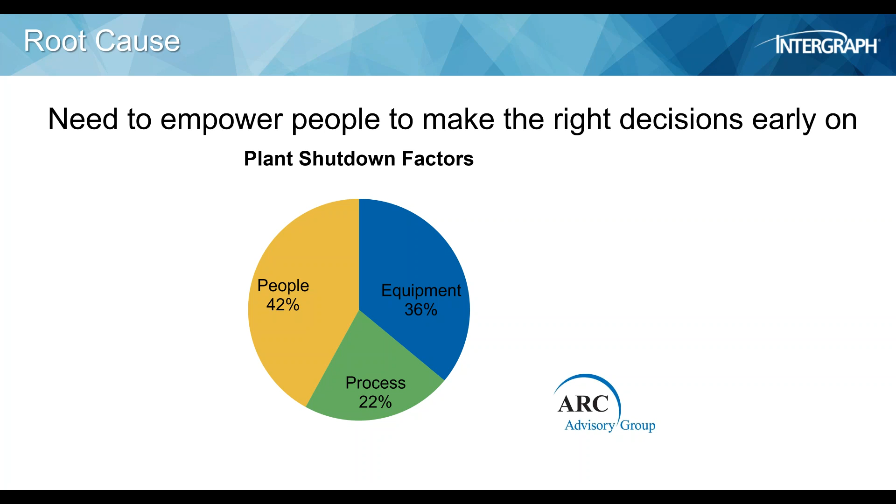It's just the fact that we need to empower the people at the plant with the right information. I say information, not data, because to me information is the data in context. That's very, very important, to have that information in the context of the task you are performing. And I know for sure that we can definitely lower that 42% number, because obviously that's not a good thing.

Here you see some other numbers from ARC, very interesting, that the biggest revenue loss is of course from operator error. And like I said, it's not intentional, it's just that not having the right information at the right time, and with that, not making the right decision.

You see 60% of the operational downtime is caused by delays of finding stuff. Even I, as an engineer, know that I spend a lot of time finding stuff, and that's kind of not fun and boring. You want to have it quickly there and spend your time on the real work you need to do, either engineering or operating the plant.

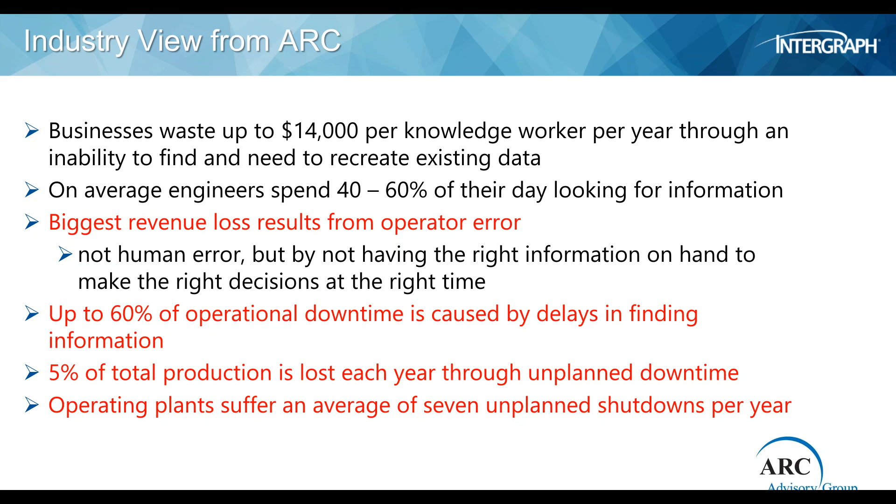But you see tremendous cost is involved when you shut down a plant. If you ever, on average, 7 shutdowns, unplanned shutdowns, that's terribly costly. So we definitely need to do something about it, and I think we can do something about it with this engineering design basis. Now you have to start at the end, like I said.

But in that small part, you already determine how this plant is going to operate, how this plant is going to be maintained, and the safety and all those very important aspects that are so important when you operate the plant. So to be able to do the operation right and to save cost, you have to start at the end, and you have to think about these things early on.

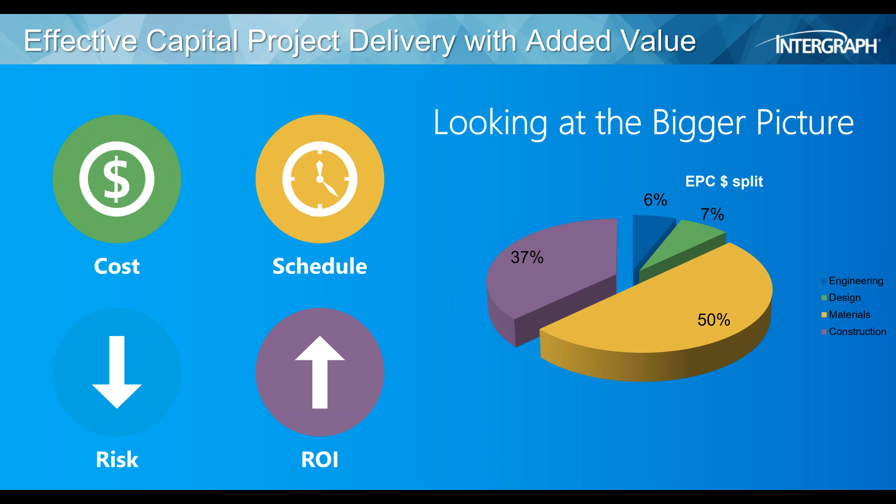Of course, the challenge is that these days these projects are very, very complex, and some of them are very large. I've seen projects like LNG plants that have 2,000 P&IDs. It's a huge facility in the Middle East, and for an owner-operator to check all this data and all these P&IDs in these fast-track projects, which seem to go faster and faster every time, is just a challenge, and it is almost impossible to do that by hand.

And I'll talk a little bit about how a computer can help a little bit with that goal, to make sure that you get what you want, not only to build the plant but also to actually operate the plant.

And there are a lot of standards. The good news I always say about standards is there are many of them. It's not only design practices, it is safety practices, it is also practices from customers.

I took this example - Shell is a Dutch company, I'm Dutch, so I feel some relationship with them, and they have what they call the DEP, design engineering practices. That's their way of putting the design together based on their experience, their best practices. They also want to make sure that once it is put together, it is not only engineering sound, but also operation sound. Of course, they have many years of experience, and they feed it back to those design practices.

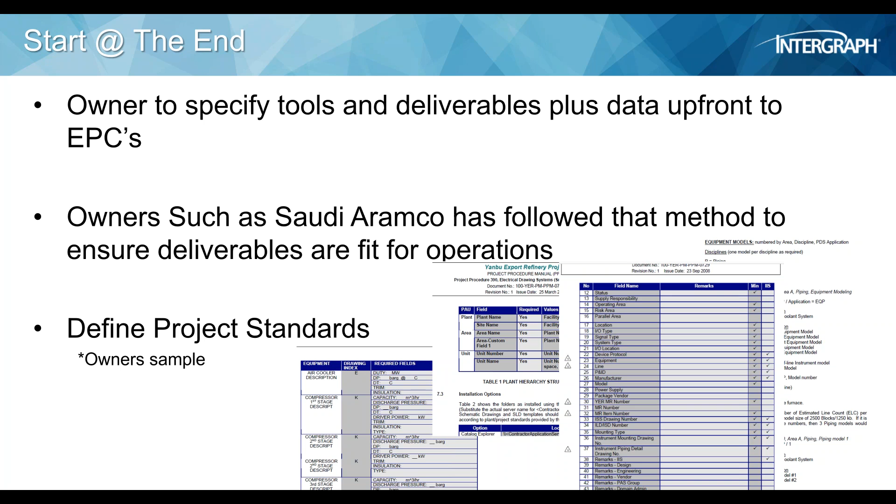As an EPC, you only have one objective, and that is to get enough data to buy, install, and maybe commission - and that's it. But then after that, the owner takes over, and maybe he wants additional information that he thinks is important and can help him in the operational phase. But if you don't ask, you don't get. And if you ask after the fact, it's going to be very difficult and/or very expensive. So start at the end, make sure you define it up front. It's a lot cheaper, and a lot better, and it will get you the engineering information in the end that will help you in the operational phase.

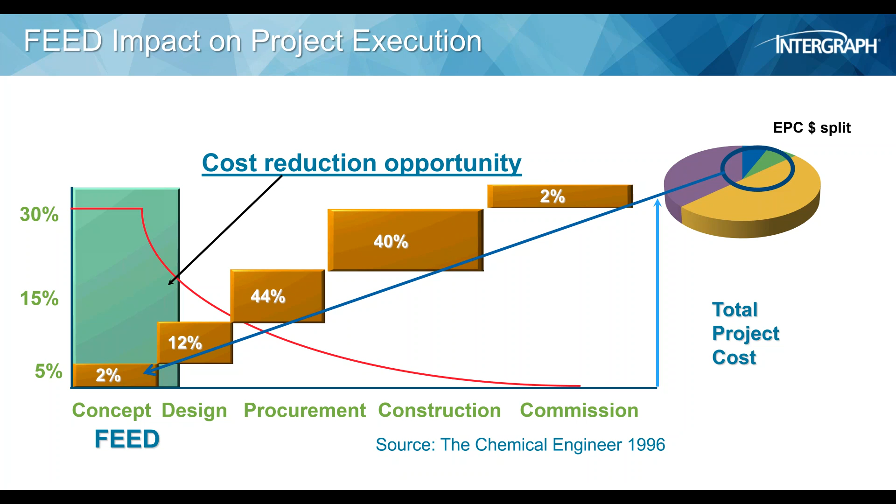Just some lessons learned from my side. It's the same domino effect: if you make some assumptions - and engineering is about making assumptions early on and then refining it till you finally have the final design that you're going to implement - there will be changes, of course. I don't think a project is ever executed where everything is right in the beginning and you go one time through this whole workflow and be done. No, there are iterations, but of course you want to minimize this rework and iteration, so making the right decision early on, that's the trick, to not have this ripple-through effect, or at least minimize it.

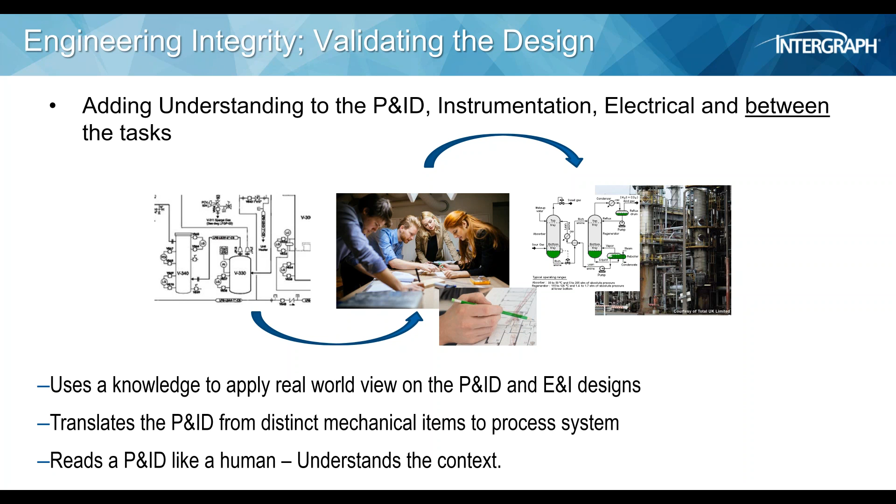So basically what we need is some kind of system that can read these designs, the P&IDs, instrumentation, whatever, like an engineer, but then automate that. Because when I was an engineer, we basically glued the P&IDs together and had them on a roller board, and we just rolled them backwards and forward, and everybody's leaning over it scribbling on it. You can do that with a couple of P&IDs, but when you have like 2,000, it's going to be a lot of scribbling and take a lot of time, and by the time you're done, the next version is there and you start all over.

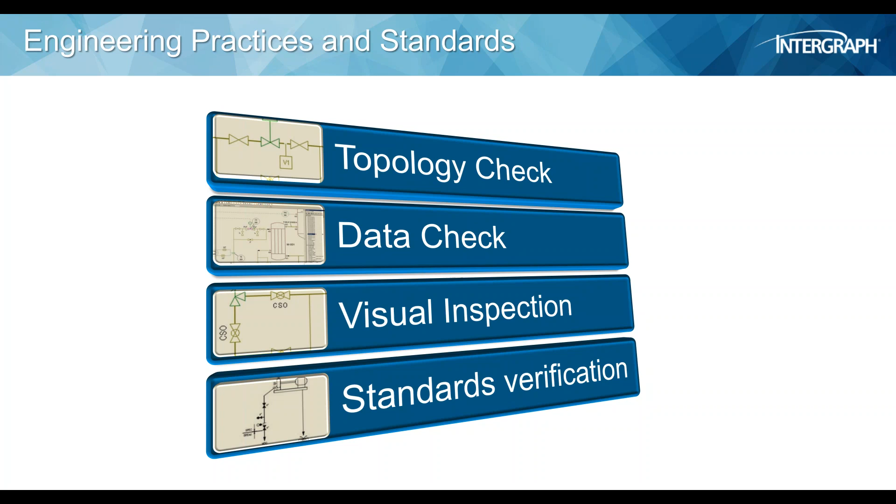So we knew we needed to somehow capture that information, capture that data, and automate that checking, at least for the bigger part. We want to check the topology, the data, the visual, the drafting stuff, like the right labels and symbols, because in the end these deliverables - I'm just taking the P&ID as an example - they'll be printed and somebody has to read it, even in the field. He wants to know if this valve is car sealed open or not, because that tells him something about how to maintain and operate that particular component. And of course it's checked against the standards, there are many of these, plus your own company practices and standards.

So for instance, I have this little example, very simple, but you see this pressure relief valve configuration - all the piping and everything is hunky-dory. Now you have to test that pressure relief valve to make sure the setting is right and it operates right. It's a safety instrument, so you need it to be correct. But little problem - if you look, there is a drain missing on the top line, so they basically cannot isolate and drain it to safely test it. That's a problem.

That can cause people to say, okay, I'm not going to test it, which could later become a safety issue, so you don't want that. You want to do testing and checking up front to confirm yes, this valve is there, and we can automate that for you to make sure the design basis is right. So if the operator goes in there to do the testing, yes, all the components are in the right place to do his work.

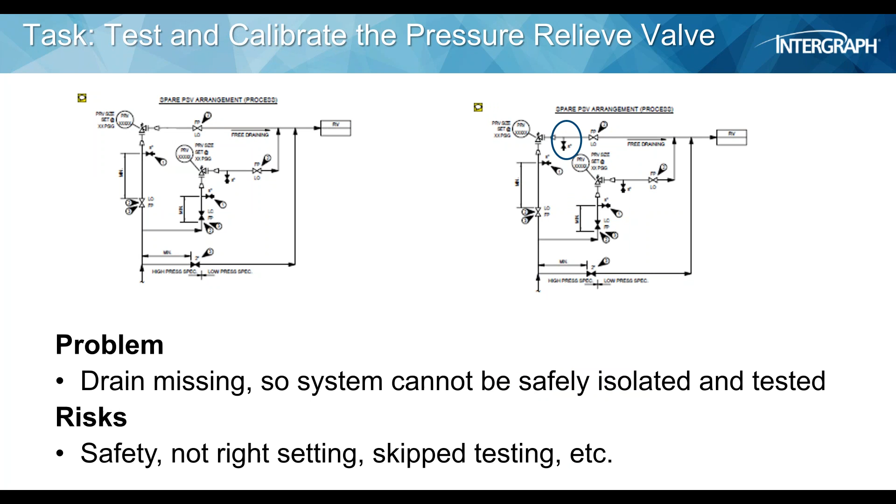And of course this can also be done - I took the P&ID since that's such an important document for the plant, but the same applies for instrumentation, which is also very important. Check if you have the right cables for thermocouples, for electrical, if you have the hand switch for lockout-tagout, to put your hand in a pump when somebody could switch it on - that's not very healthy - and have the right enclosures with respect to area classification and so on.

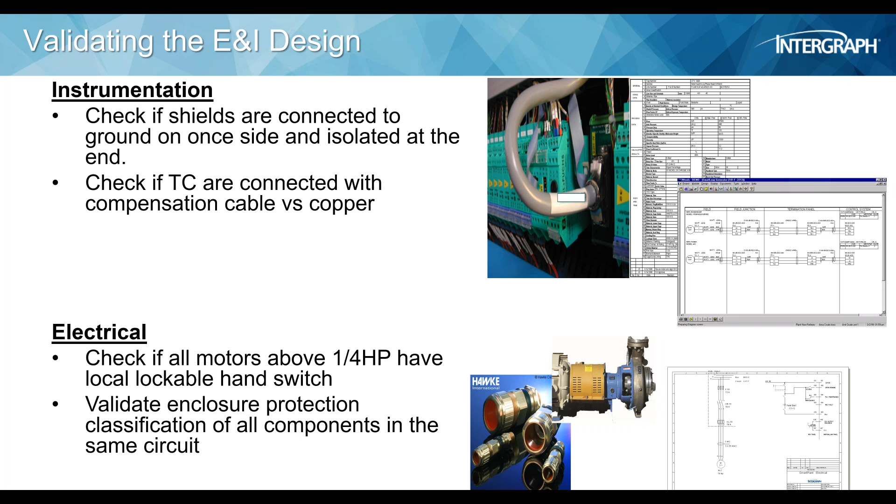So you can check that early on, so you have the right stuff, not only within the task, within the disciplines, but also across the disciplines, like across process, the P&ID and instrumentation. Make sure you have the right valve, the right line sizes, the right process data, to have consistent data there for later on if you want to do some maintenance or replacement of that component.

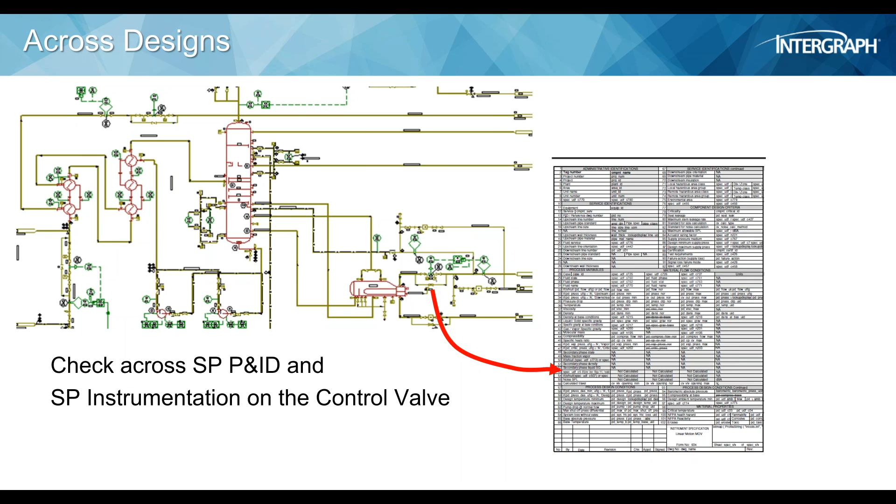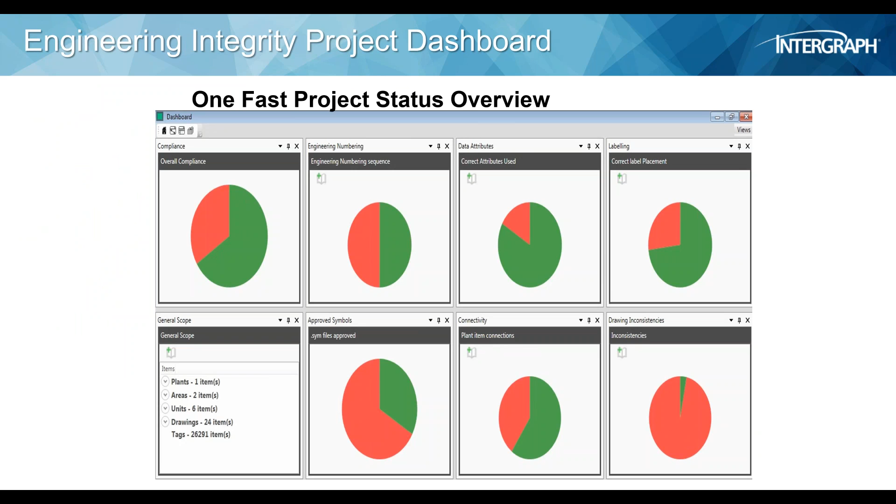Now the cool thing is, and everybody these days is asking for dashboards, it's very fashionable I guess, so we also show you here a little dashboard, and obviously red is not good and green is good. The nice thing is when you're at the plant and you've done some of these checks against the design, because there's always changes during the running of the facility, you can do this check on the EPC side, but also at the owner-operator side.

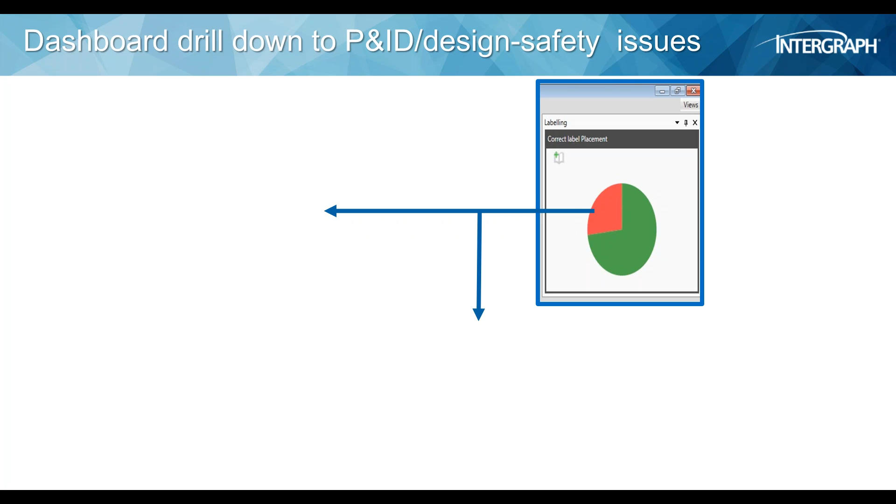You can actually click on one of those little tiles and navigate to see reports, and also actually a picture of, hey, what is actually wrong there? Can I live with that, or can I not live with that, and fix it? But the thing is, you have all this information at your fingertips, and it's coming from one single source.

Rather than, I have a P&ID, my own P&ID on my desk that I marked up for the last 5 years, but somebody else has the same P&ID on his own desk that he marked up for the last 5 years, and guess what? They'll never be the same.

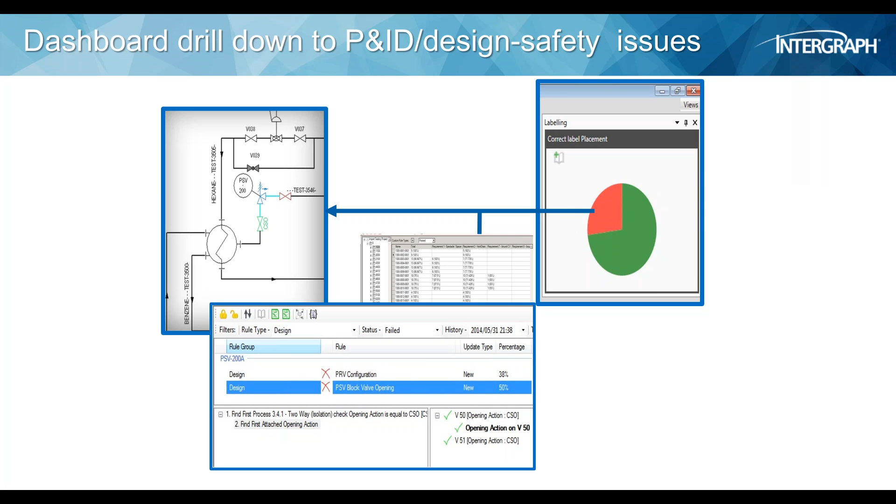So once you have the engineering design basis created, you started at the end, you've defined everything, you have everything in place, and now you want to use it. I'm going to give you some examples.

So, of course, you want to reduce the risk, safety, and make sure the guy has the right information to make the right decision, and doesn't fall in the category of the 42% that accidentally pulls a wire or something to shut down the whole plant.

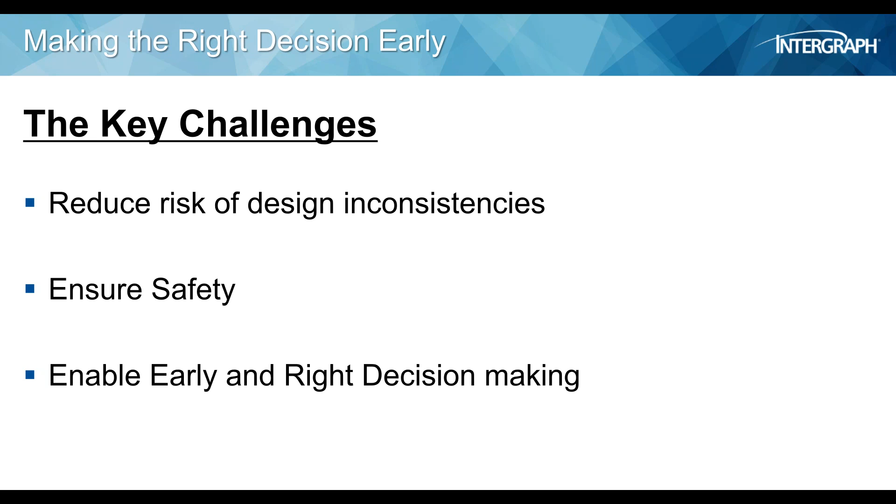That's bad news. I understand that engineering systems, like P&ID, instrumentation design systems and so on, are not mission critical, as I call it, for a plant. Mission critical systems, what I call mission critical, are like a DCS system. I have never seen a plant run without one, so you have to have that safety system, process systems. There are ERP systems, there are mission critical systems in a facility.

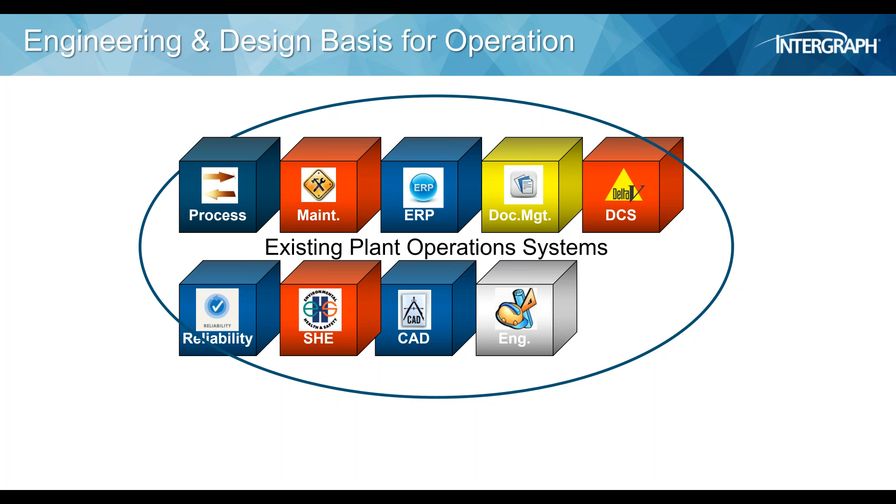However, if you look at those, you see that most of these mission critical systems have some kind of a need of this engineering data, engineering and design information. DCS, of course, they're looking at the control system data, the safety system at the P&ID and process data, and so on. So there is definitely, the engineering and design basis plays a critical role in mission critical systems that you have on a plant.

So I mean, if the P&ID system goes down, the plant doesn't go down. If the DCS system goes down, the plant probably will go down. But 1 and 1 is 3 — if you have both of them up, I think you can leverage that information and capability to help you lower cost and risk. Now, some examples.

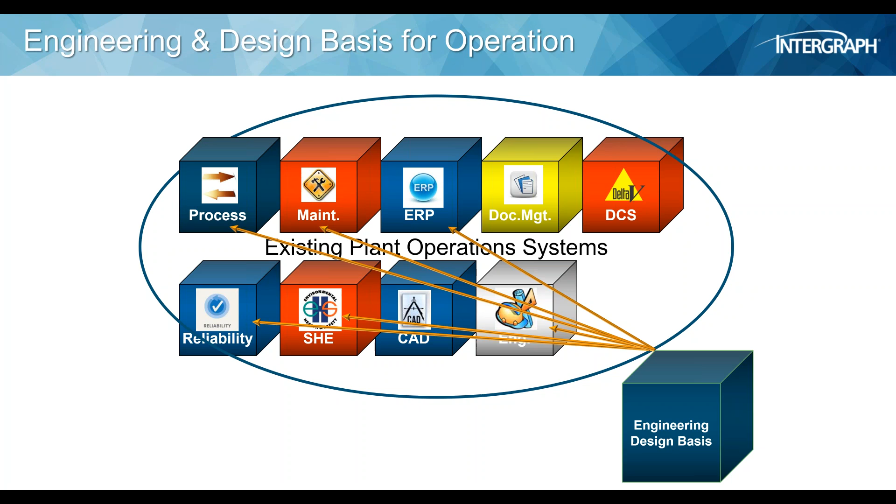Now this particular maintenance guy in a plant in China, you see in the picture maybe that he has a little sniffer there that he holds up to the flange, and what he does is LDAR, leak detection and repair. So he has to go to the plant with his sniffer and collect the data and see if something is leaking, and of course if it's leaking too much, something needs to be done.

So they use the P&ID as the roadmap for the plant. I don't expect you to read all the numbers, but the red little tags are the points that he has to go to with his little sniffer, and we can actually tell him when, and keep track of it, and manage that he doesn't skip anything and does it all on time.

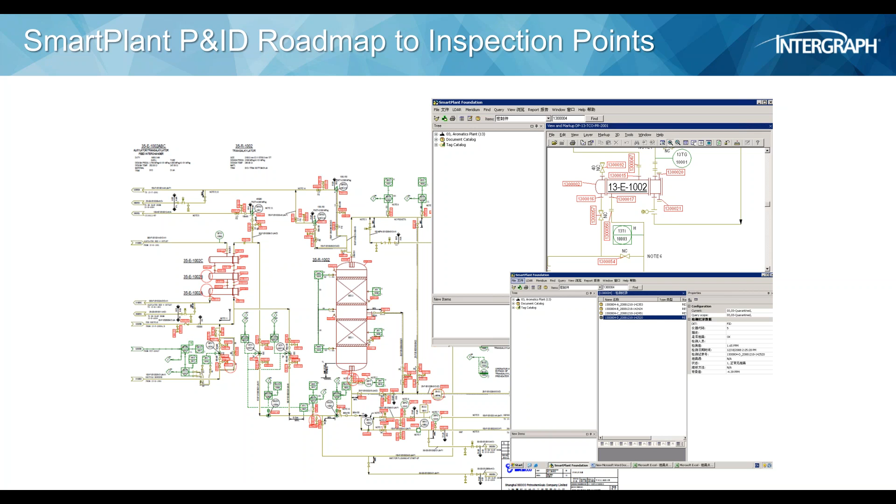So once he's collected that information, he can do a risk-based inspection with the system out there. And if this thing is leaking too much, then it can actually be given to SAP, and a work order is issued to replace something, fix something, whatever is needed, and then update the design. Voila, you have the updated engineering and design basis for the next round of checks. But you can see here how the P&ID is actually helping manage and make sure this LDAR is executed right.

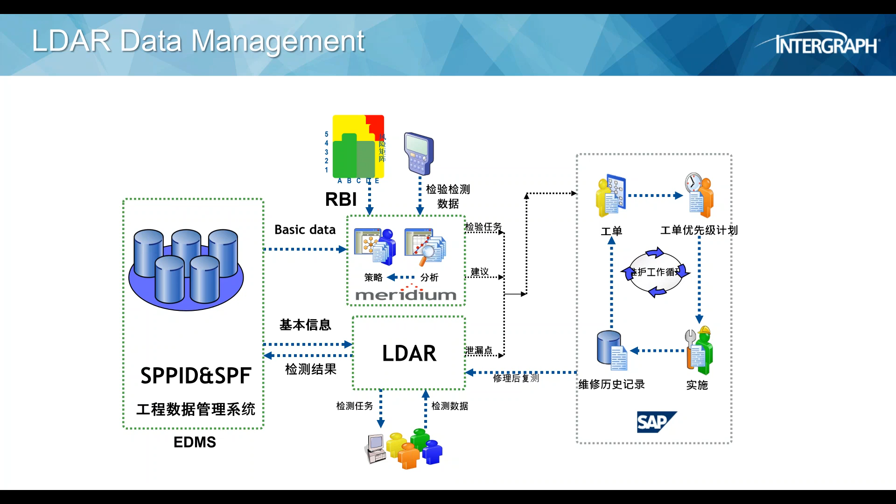And it could also be a safety issue because there's something leaking that could be flammable. That's also another good thing.

Instruments are very important. They play a role in safety, like we just talked about with the pressure safety relief valves, but they also play an important role in making sure you have the right quality of product produced, checking temperatures, levels, flows, and what have you.

But it can only check right if it's actually acting right, and you need to calibrate that. You see the guy with the little yellow box there - that's a Fluke calibrator in this case. On one hand you have the engineering and design basis, the instrument data, the specification of this instrument type and how it is behaving.

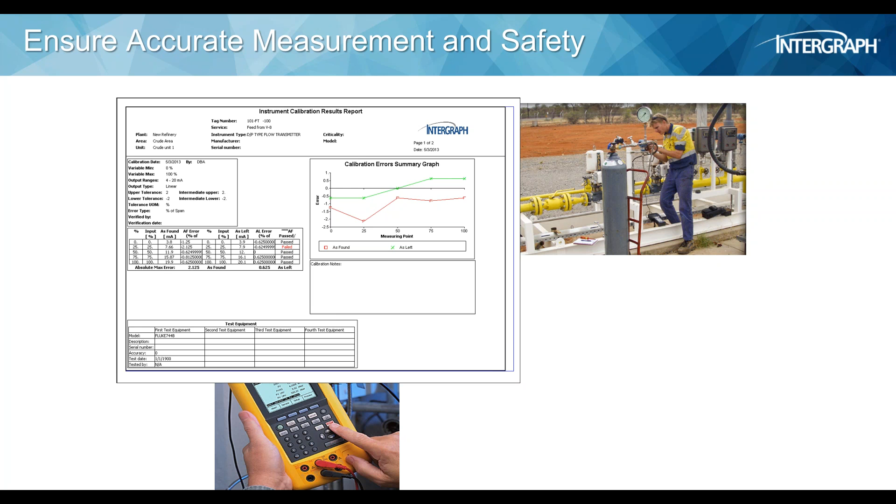Now the nice thing is when you calibrate them and upload it back into the system, you can do what they call as-found, as-left, and recalibrate, but you can also see how this instrument is behaving over time. That may give you the right information to decide that maybe this isn't the right instrument for that particular task and replace it, so you have to do less calibration or have fewer set points for this particular solution. That helps with safety, can help with product quality, and can help reduce cost, since you don't have to calibrate the thing every week or so.

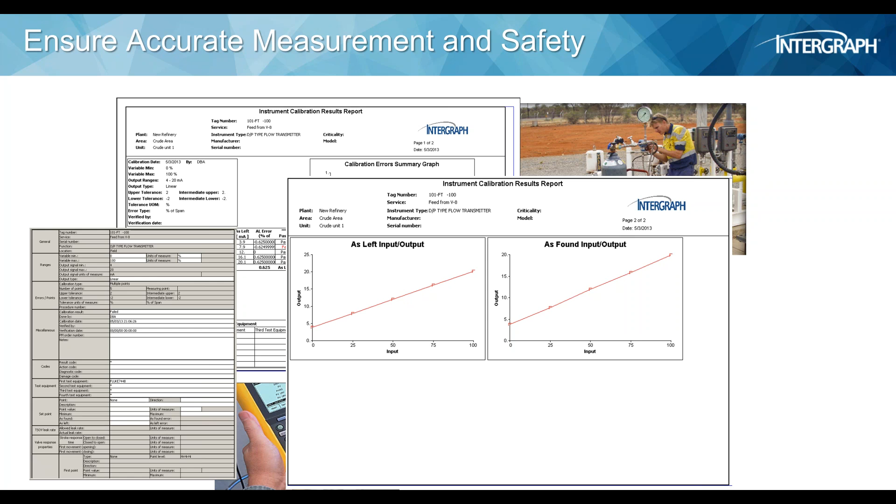Another example is when you want to do maintenance on a piece of equipment, you want to make sure it's isolated, electricity switched off like I said before, with a lock on it and a label and all that. But also for the process, you have to turn down or close all the block valves, and to find them, the engineering database can help you locate those, because when you have all the lines connected in an intelligent way, you can navigate back from the equipment you want to isolate to the first available place to isolate it.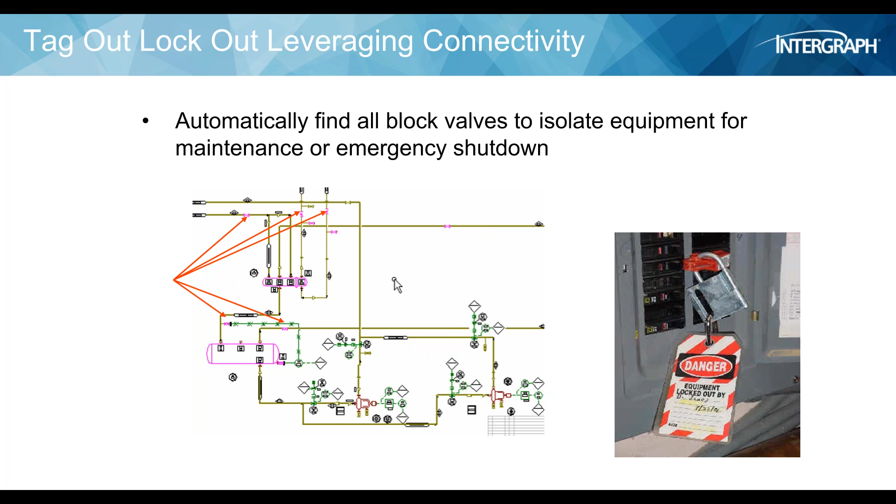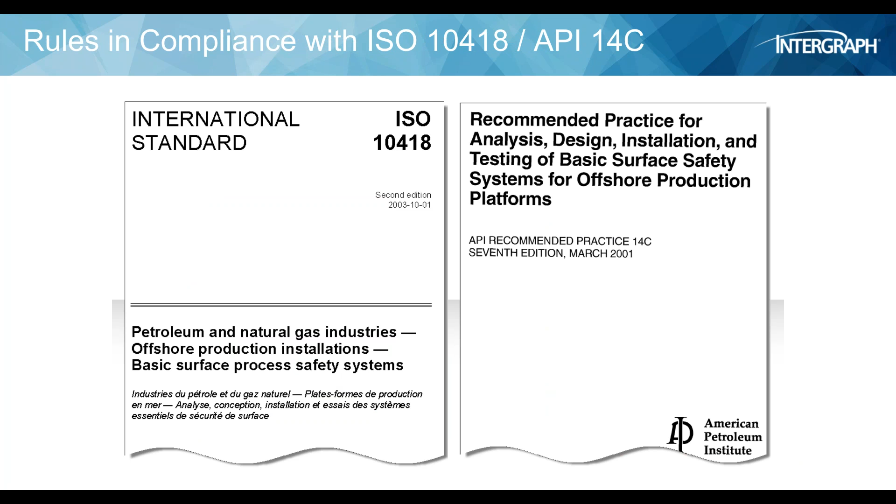Now safety - I told you already there are all these standards out there. This one, ISO 10418, deals with safety systems on offshore platforms, and there are a whole bunch of rules in there. This is just an example of how they hook up a pressure safety valve and all the equipment around it. This is just a procedure, but then it has to be translated into the design.

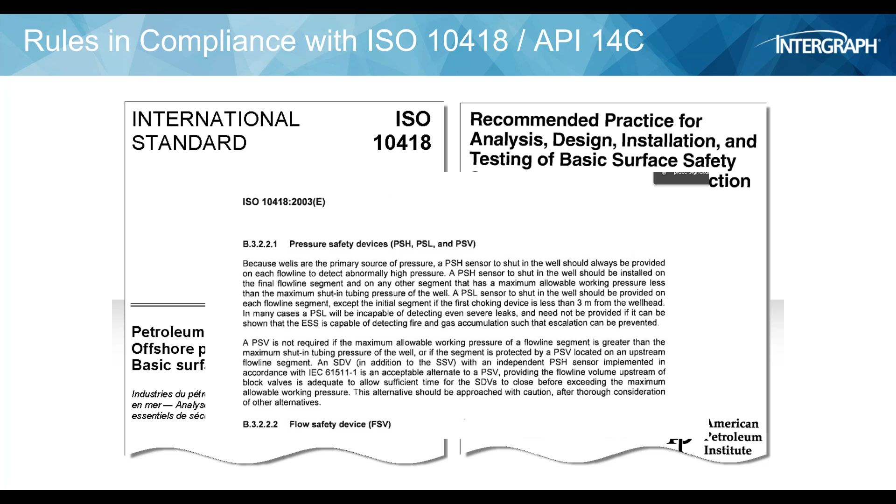So in this case you have a vessel and all this stuff around it, and how do you check that this is in compliance with these rules, and stay compliant with them? You can actually check that with some rules in the engineering and design base. So you can check the design, and if you make changes, you can recheck it to make sure it's still compliant with these standards - for instance, that you have the right components, the right piping, the right pressure setting.

You don't want the pressure relief valve to have a lower or higher setting than the vessel before the valve opens - that's not the intention of the protection. So once you check that, we can create these reports, and you see the green ticks where everything is fine, and red ticks where something is not in compliance anymore. You just have to check it, make sure it's right, and not discover it after the fact.

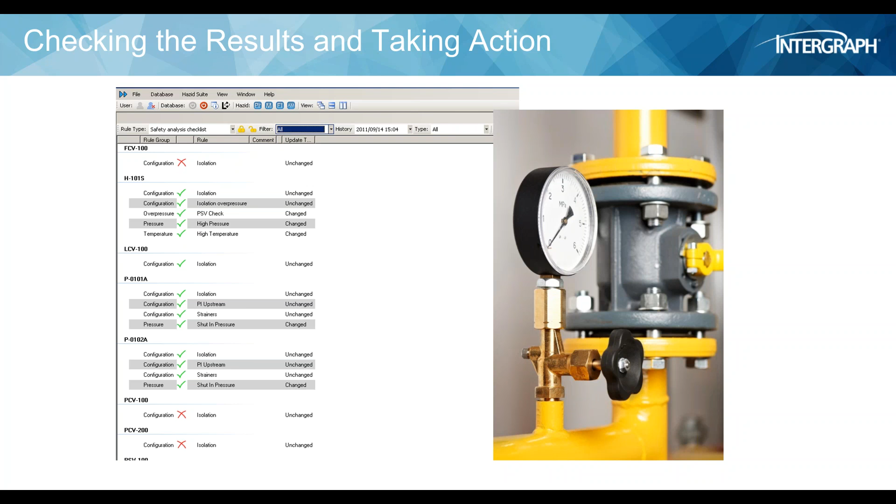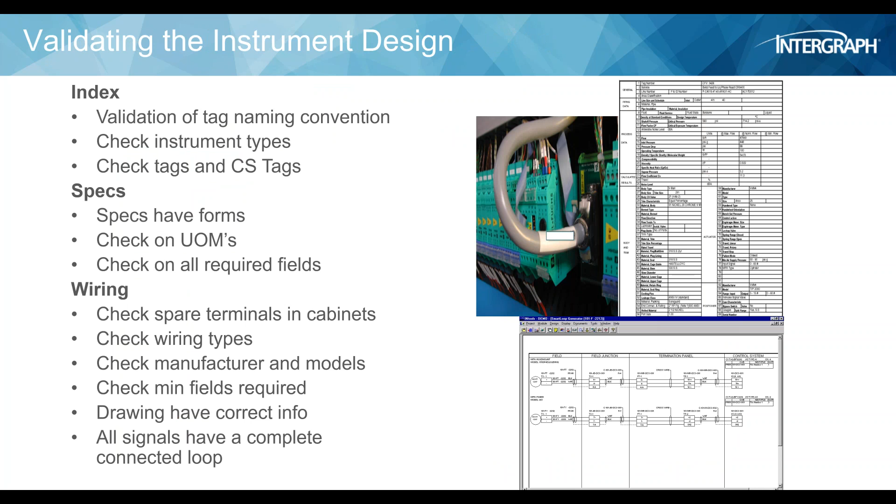That's not good news. So I gave examples earlier too, because I don't want to give the impression I'm only looking at P&IDs - instrumentation is the same thing. You can make checks at the engineering phase, but also at the operational phase, to ensure your engineering and design base is solid and sound. Same with electrical, of course - whether you have the right cables and the right enclosures and what have you in the electrical design arena.

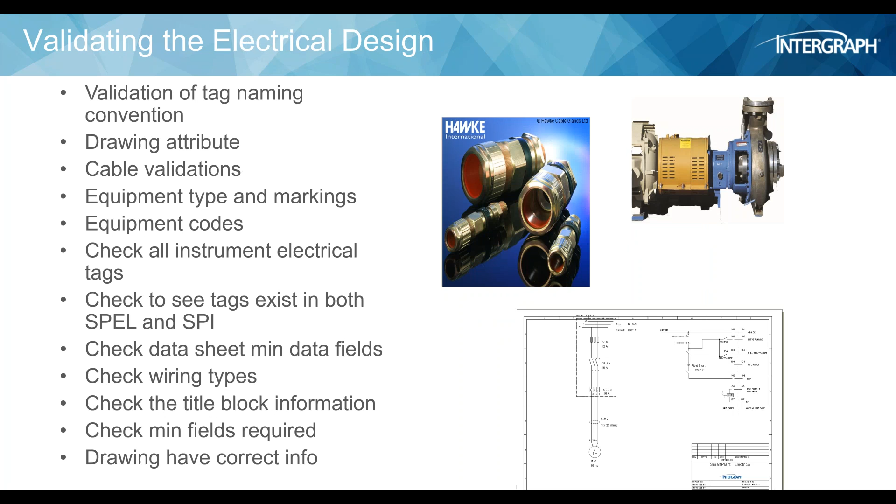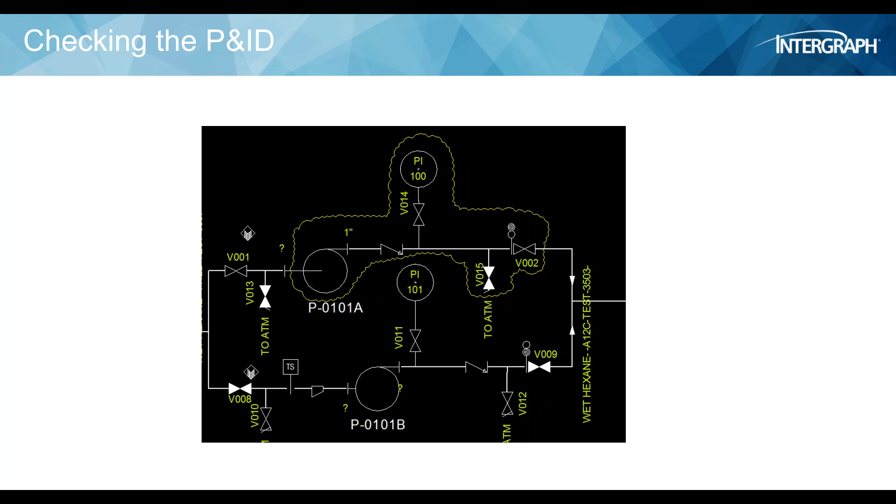But if you look twice, you see the PIs are nicely aligned, which gives you an impression that it's looking good. But if you look closer, you see that one has the check valve directly after the discharge, and the other one has the check valve after the PI. So the location is different, and it's not right, it's not consistent. When people make changes, you have to keep checking if it's still correct with your engineering practices, so you keep the design basis right.

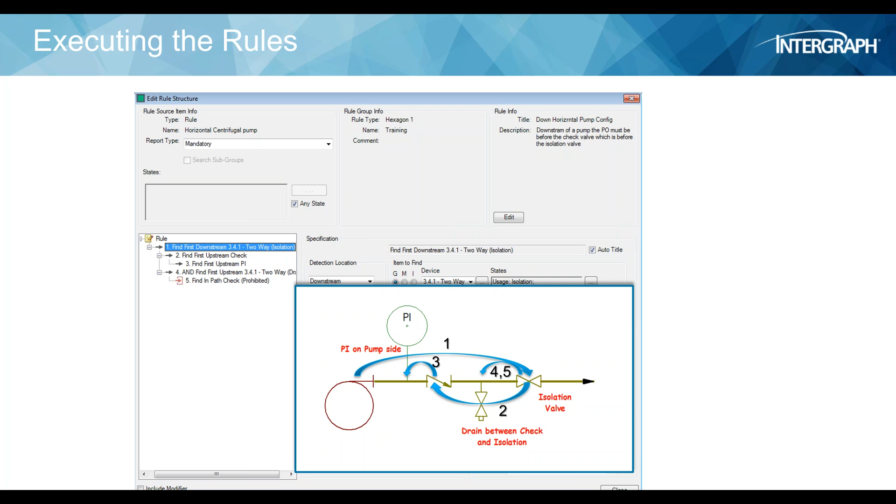Some people ask me, that's all nice talking about these rules, but I'm not a computer scientist. Well, I'm not either. These rules are not so difficult to make. If you know about engineering, anybody that knows that can make these rules. There's a simple way of nesting all these questions into a simple user interface to make these rules, so you can make rules for your own practices, your own safety standards, and what have you. There's no magic involved here, and you don't necessarily have to have a computer science course to do this.

Another example is the company Bayer. Well, actually this is their plant in Antwerp. They renamed their facility, this is a Covestro company now, but it's the same method and the same thing they're doing. They use a web-based viewer to access the engineering and design basis, so they can see the P&ID, the data sheet, and the loop diagram, as you can see here.

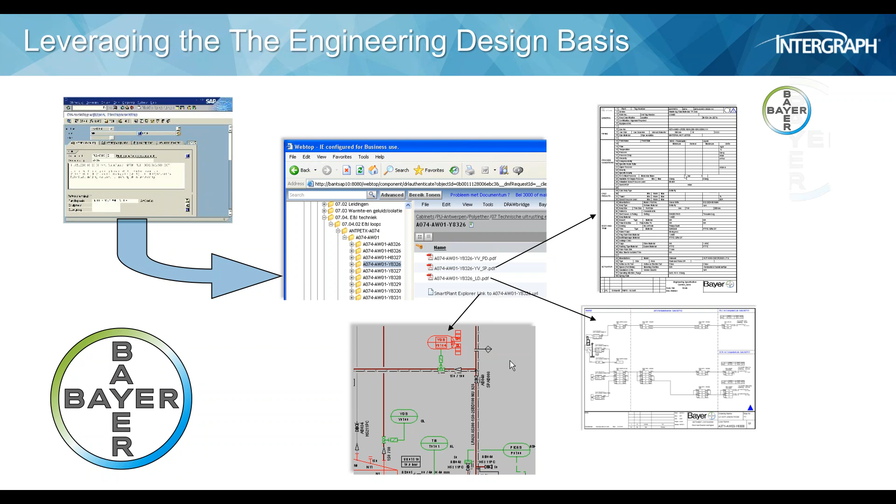What they like to achieve is, of course, safety and reduced search time. They've got this little web tool, and they can do a simple query for the people out in the field, lower cost, and of course super fast. Then they can initiate a notification to their ERP system, SAP in this case, to make fixes. The whole idea is that you have a single source, the engineering and design basis, that everybody can access using this web tool, and get the data to make the right decision at their fingertips.

If you want to go to an instrument and unhook it or do something with it or replace it, you can get the information to see, okay, if I do this, what can be affected, what's the spec, what is the wiring, and so on.

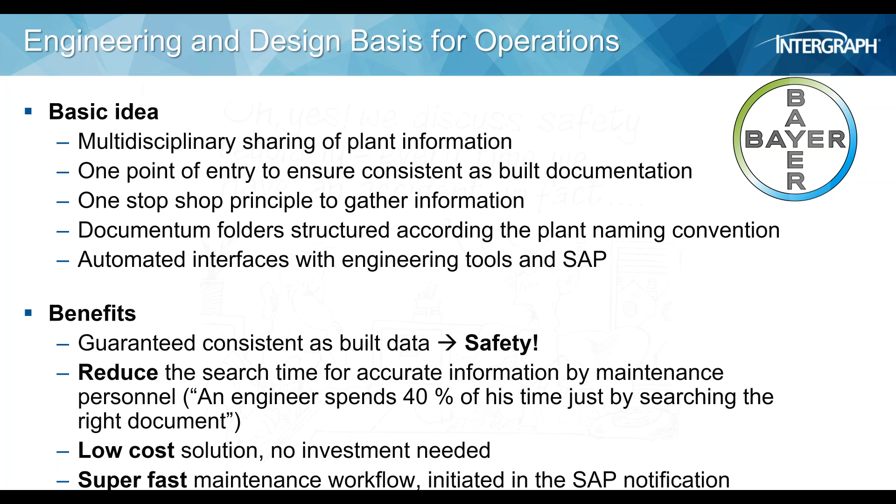Let's talk a little bit about safety. You see these guys discuss safety every time when they have an accident, which is not a good thing, after the fact. We want to do a little bit better and get going from a reactive type of setup to a safe, sustainable operational excellence.

That's what we want. You will see that when you do that, your cost goes down and your production levels go up. So you need to put procedures in place and access to engineering information in place to facilitate this road from reactive things, like the two guys were just talking about in the slide before, to safe, sustainable, operational excellence. And it is definitely possible.

Part of it is also people. You have to make it part of your culture, and you have to train. I understand that, that's a big part actually, I think. But also in combination with that, you have to have the right tools and the right information to make that happen.

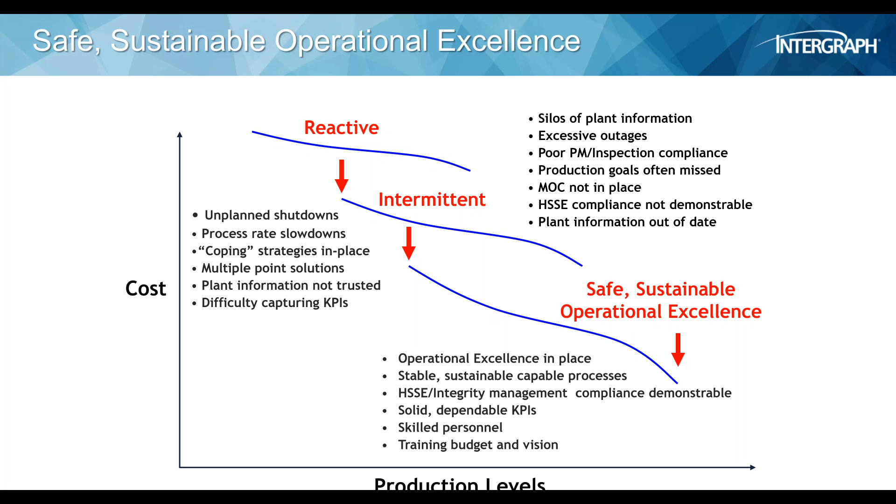You see here the OSHA 14 elements, a whole bunch of them. I'm not going to go over all of those, but the bottom line is that there are solutions out there that can help you with these 14 elements. It's about requiring access to asset lifecycle information. Some is document management, some is 3D, some is the P&ID, some is training, but there are definitely components out there that can help you. The engineering and design basis is definitely one component that plays a role in, I would say, the majority of these 14 elements.

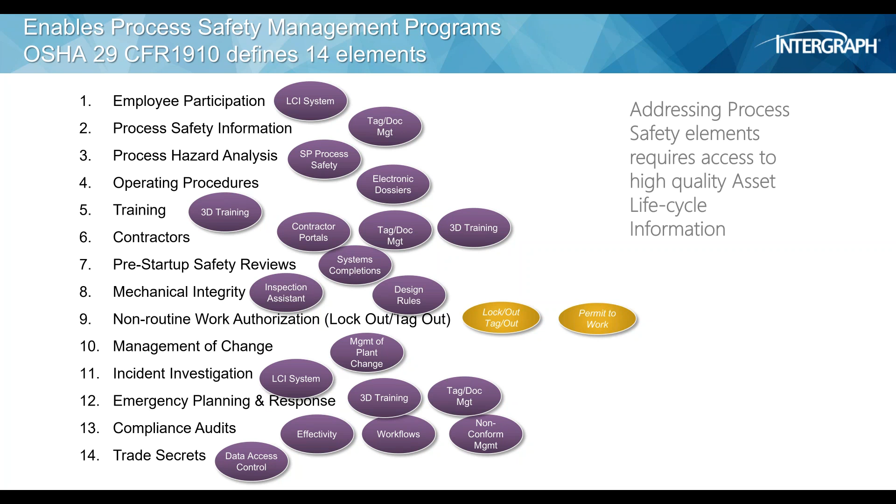Talk a little bit about safety. Now, everybody always talks about HAZOP, so I thought, okay, I'm not going to talk about HAZOP. So I'm going to give you another example.

This is, you all probably have seen this type of drawing, area classification. It's also very important. On this 2D drawing, normally, it gives with these shapes and hatching an idea of where certain gases can be present at the plant, either at certain times or all the time, and knowing that, what kind of enclosures or safety measures you need to take.

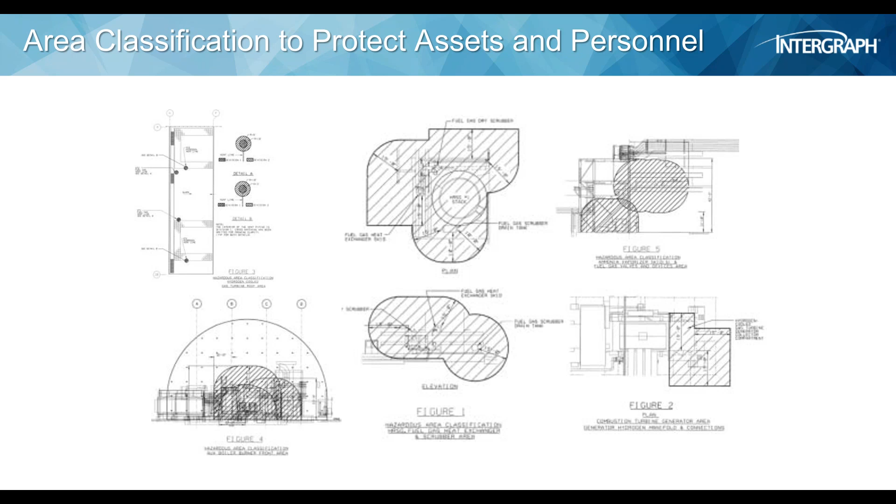You don't want to light a cigarette in one of those areas. There are different standards, the Class 1 Div 1, but you also have the European standards. But it all boils down to basically defining the areas where there are explosion possibilities, and you want to make sure that you do the right thing.

So I thought, okay, we always made these things in 2D drawings. When I worked at Fluor, the electrical department was responsible for these drawings. But I thought maybe we can do something smarter there using the engineering data. So I thought, okay, we can maybe do it in the 3D model, because it is a shape anyway, it's not 2D, it's a certain area.

It's not a flat thing, and you need to identify that, and then maybe it can help you make sure that you have the right enclosures, and if you have to issue permits, that you know what's going on in the plant, if you have that data right. So it's kind of using some rules as a watchdog to make sure it's the right stuff.

So I'll show you a short little AVI on that. Now you see the 3D model and the P&ID. Now the piping guy is taking the valve from the P&ID to place it in this pump configuration. And with that, you can not only get the valve, but you also get the process data and everything associated with that, and also the area classification.

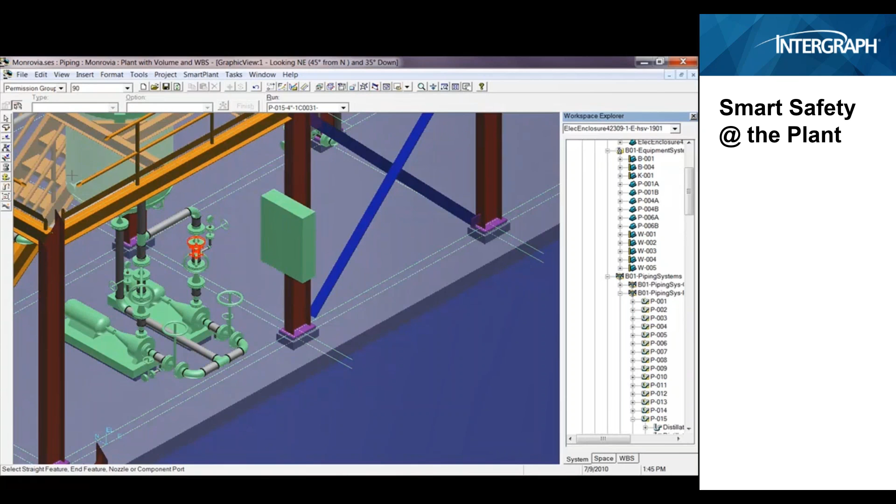Now, we can execute rules in the background. They're constantly running there as a watchdog, and say, oh wait a minute, based on these rules - and you can set dimensions, I chose a sphere, you can do any shape. So I said, okay, this sphere, in this sphere you have a certain area classification.

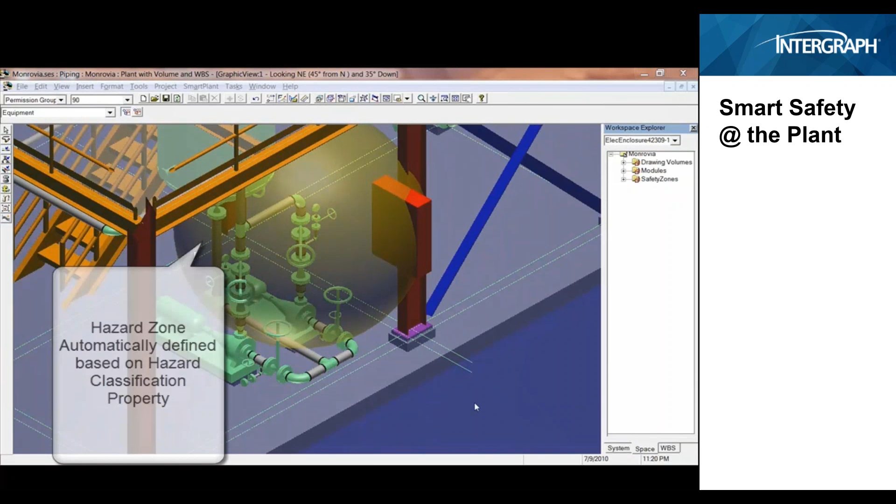Now the cool thing is, you see that electrical panel there is now turning red. The reason is that electrical panel does not have the right enclosure classification for that particular area classification. So it turns red - the rule said, wait a minute, you're in that zone, you're not the right panel.

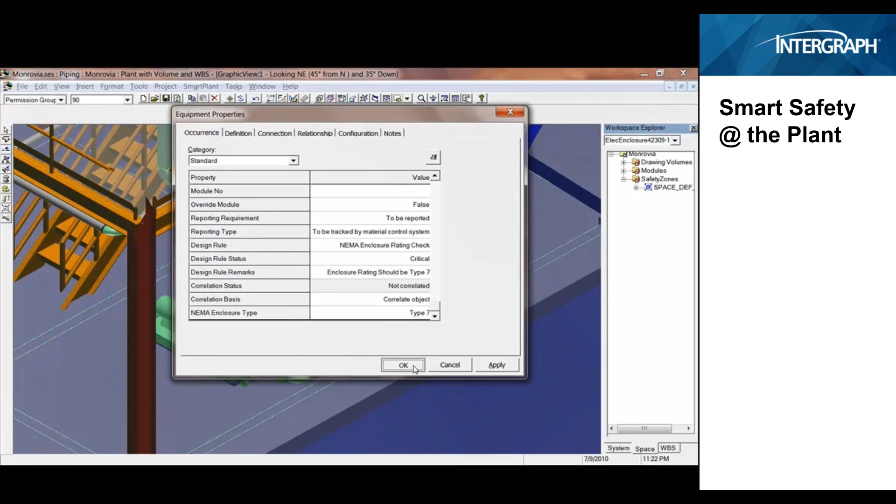So now you can do two things. You can buy a more expensive panel that is rated for that zone, or you can move it back to the other column, outside the zone. If you do it early on, you have those options. If it's installed, of course, you don't have that option.

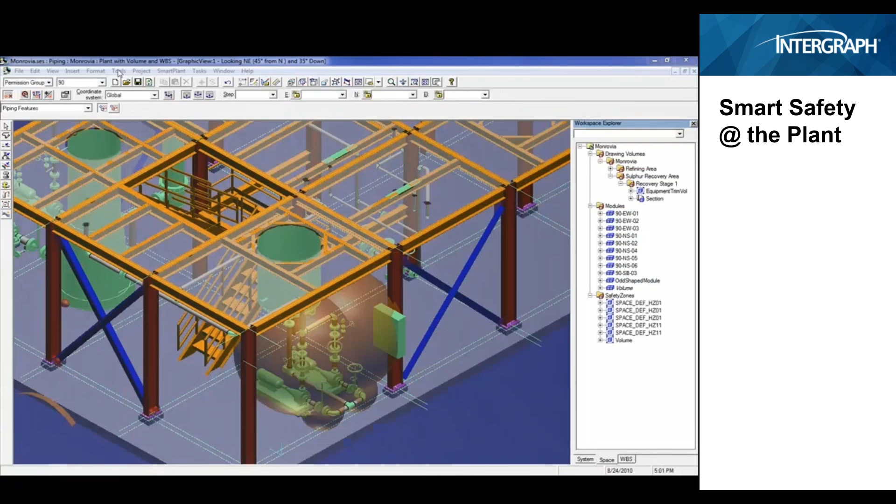Now the neat thing is that this sphere is actually related to the valve. So you see now it's green again as they change the rating of the panel. But the nice thing is, when the piping guy is moving this to the other side of the steps, the zone goes with it, and then the panel is again outside the zone, and you can go back to the old classification. And of course you can make the drawings out of it, just like before with the nice hatching - even this one is in color.

Another one, maybe a little different than you have normally seen, is this explosion impact. So you make the 3D model, offshore or onshore, doesn't matter. Of course, we have all these rules I just mentioned, so hopefully this minimizes any changes, but still we want to check for explosion impact.

Now there is this company, Gexcon, I think they're coming from Norway. We made this interface with the tool. So we export the 3D model, they do the magic, and then basically we get feedback on what this explosion impact can do, and if you have to make some changes to your design.

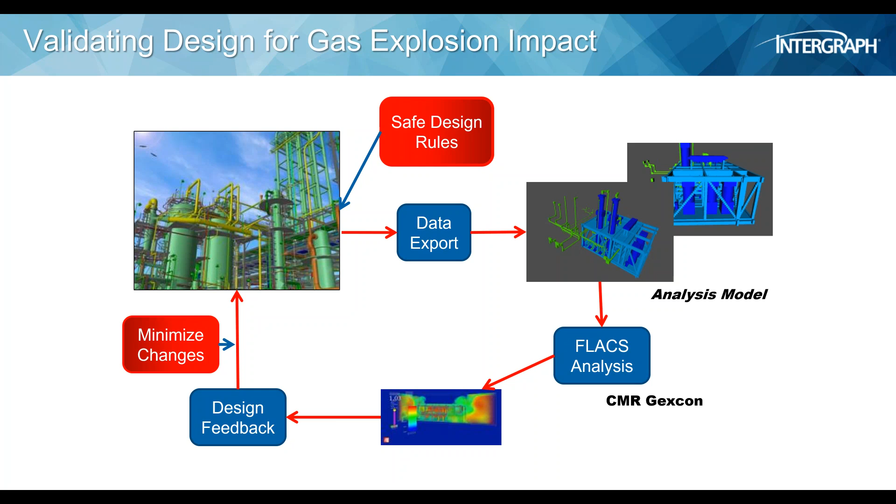These people must have a great job, because they actually blow things up and simulate these explosions, and based on all these findings, they create these models. You can see the colors denote the speed of the gas, the temperatures, the pressure, and what have you, and they use that in the analysis they do. That's pretty cool.

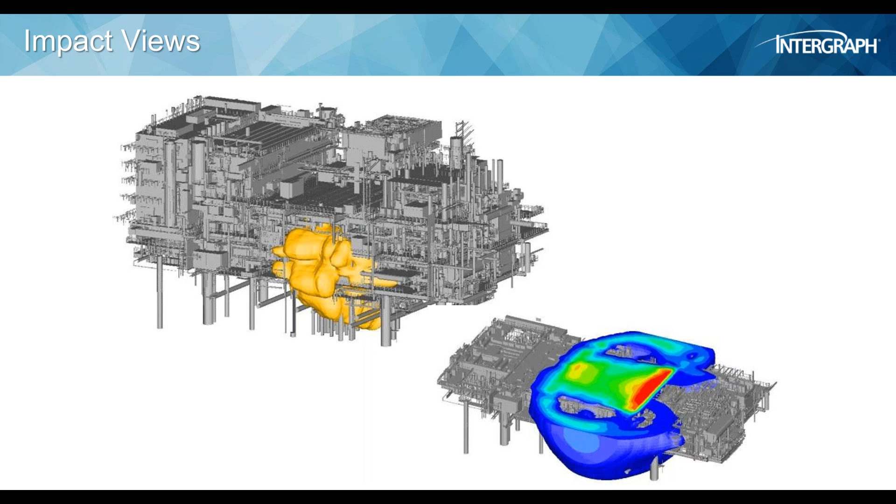Now you see this, I like this particular picture of this offshore facility. They simulated the explosion using the engineering and design data of the 3D model and the process data. With these colors and shapes you can see when something's happening at the wellheads, where the pressure goes and what the temperature is. Now you can make decisions on protection, on firewalls, on holes in the deck to let the pressure escape, because you don't want to blow off the living quarters at the end there. It gives you the right information to make the right decision in your design. I thought that was a pretty cool example.

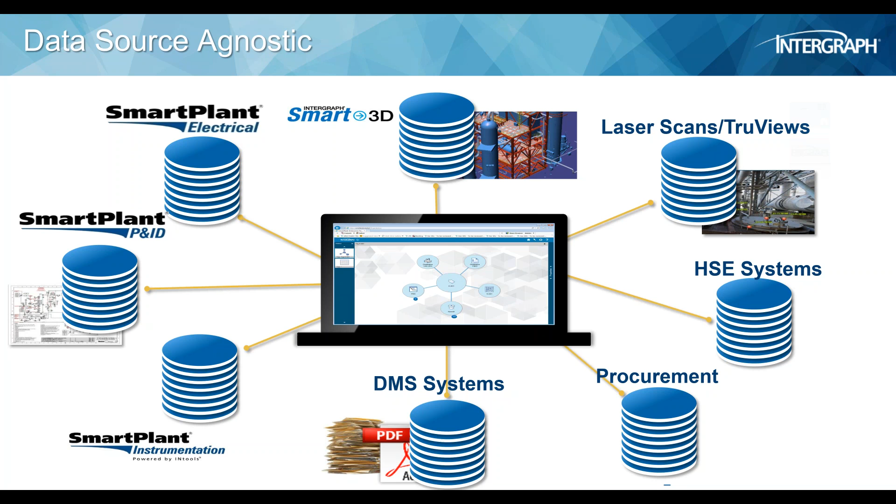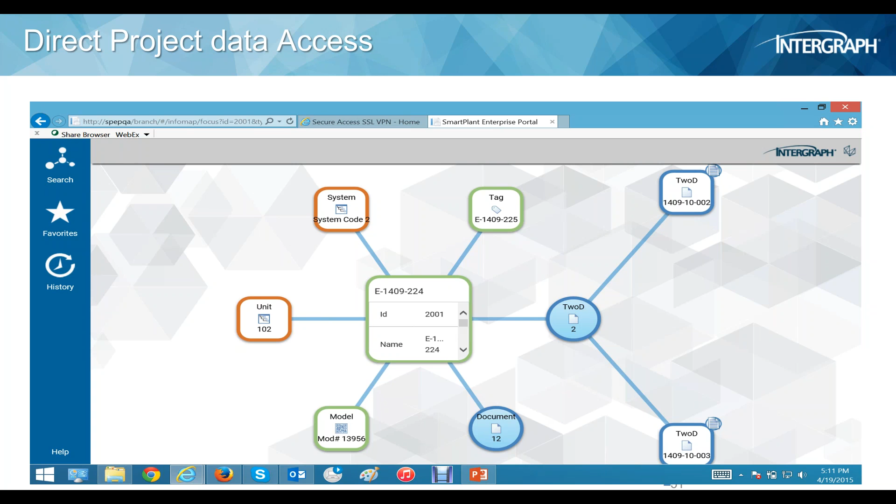So for instance, this is just an example where you see in the middle, a green block, an equipment item, and then these little satellites around it indicate related information to that piece of equipment. You can actually navigate from the equipment if you want to see, for instance, show me all the instruments associated to it, or show me the P&ID, or show me the 3D model, whatever. You have it all there at your fingertips, on your laptop or tablet or whatever you have there, coming from the single source, and using the rules that I described, checked, and you can trust that information. That's important. Now I also wanted to show you one other thing.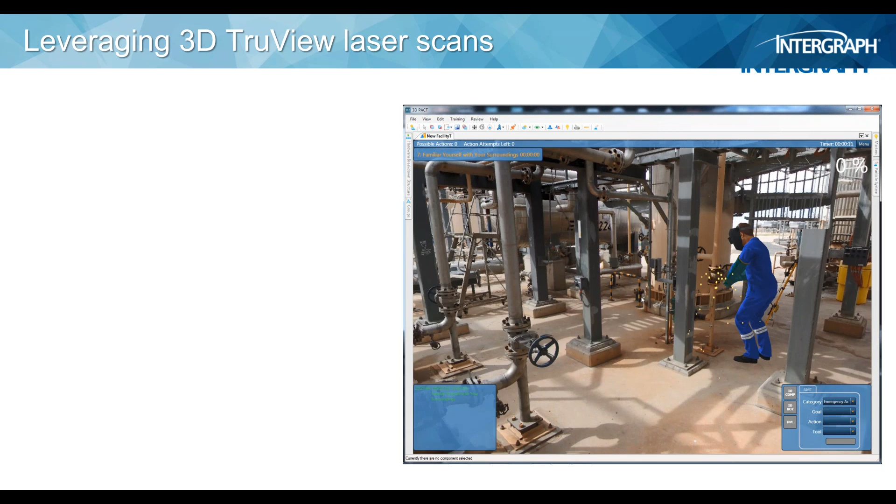This is, believe it or not, a laser scan. It looks like a real movie. At first when I saw it, I said no, this cannot be, because I thought a laser scan must be like clouds, cloud points. But no, this is a laser scan of a plant in Australia, and there are really point clouds behind this, and you can measure things and all that good stuff. And you just saw this little guy walking around there.

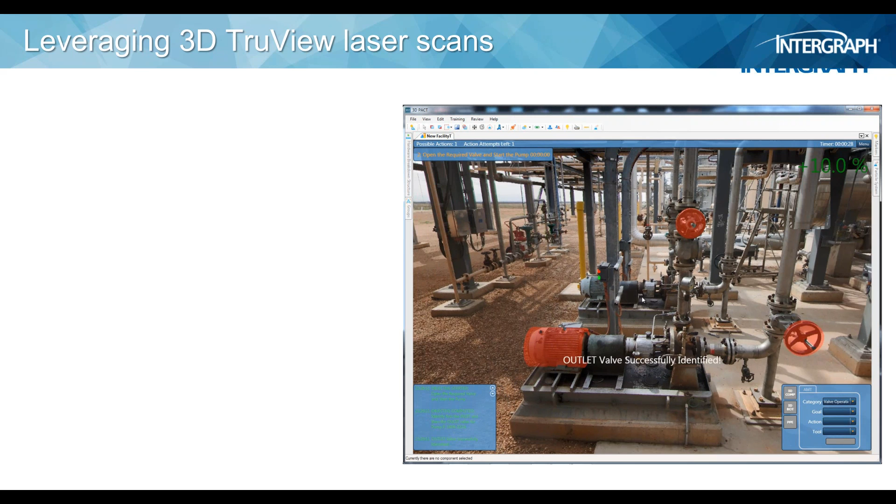And if you don't have a 3D model but you want to use it for these operational type of activities, you can very easily do these laser scans, and then interface with, in this case, a product from a company called Semansi in South Africa that interfaces with the 3D model. You can actually do operator training, see all these hand wheels going red and green. You can let them do all kinds of stuff to train them, and also put them in unexpected situations, like create a fire, and see what they do, and you can score them and so on.

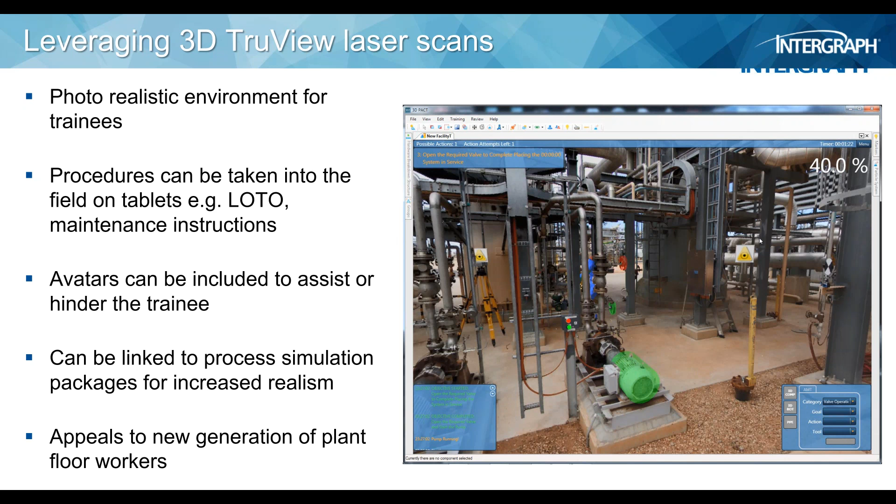So in short, if you don't have a 3D model of an existing facility, you can create this pretty easily using this laser scanning technology, and then utilize it for operational tasks like operator training. But there are other things as well, like finding stuff, locating stuff, and planning stuff for turnarounds and so on. So I thought that was pretty neat.

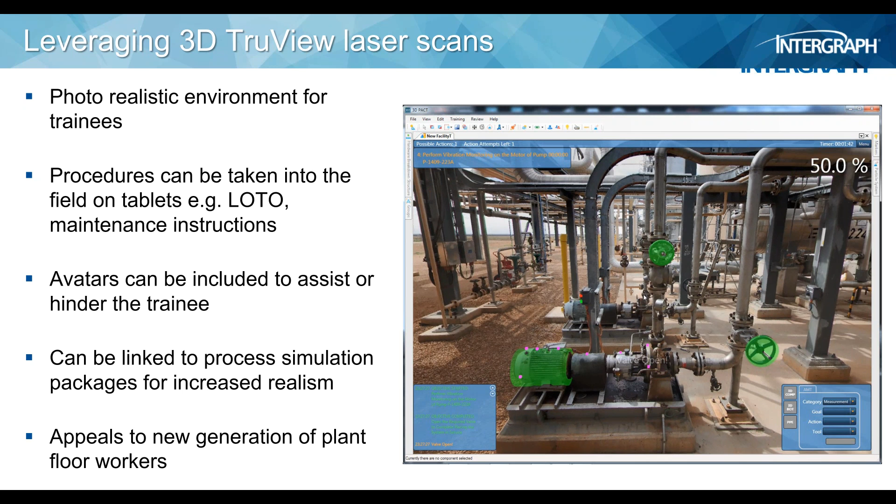All right, coming to the end here, I hope I gave you some insight of what a solid engineering and design basis can do for you when you are in operations. Of course, you need to create one early on, making sure you have the right information at the end, and then have some rules to check it not only in the engineering phase but also during the operational phase, so you keep your engineering and design basis solid and trustworthy for all the tasks you can do. And I think it can yield a tremendous benefit.

You saw ARC talk about an average of 7 shutdowns. If you can reduce it to, say, half, let's say you have only 4, which is also not good, of course, but if you can avoid 3 of the 7, that is already a tremendous saving. Anybody that is an owner-operator would have to agree with that. So you have to define up front your outcome that supports your business. All of the business drivers may be a little different from different companies, but be upfront, start early, start at the end, and then create this design basis, and I think it can be leveraged for many operational tasks. I showed you a few to definitely lower your cost and risk.